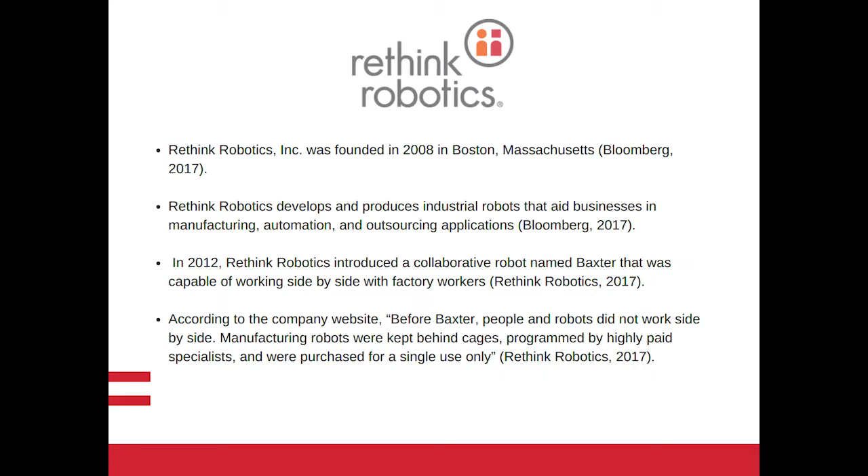Collaborative robots are significantly different from traditional robots. In the past, industrial robots were unsafe to work near, difficult to program, expensive, and were only capable of completing 10% of tasks in manufacturing.

Collaborative robots are unique in that factory workers can now engage with them in interactive ways. Collaborative robots can be programmed easily to complete tasks that were not possible in the past. For example, mundane and repetitive tasks can now be completed by robots, while human workers complete more complex tasks that require more dexterity, cognition, and judgment.

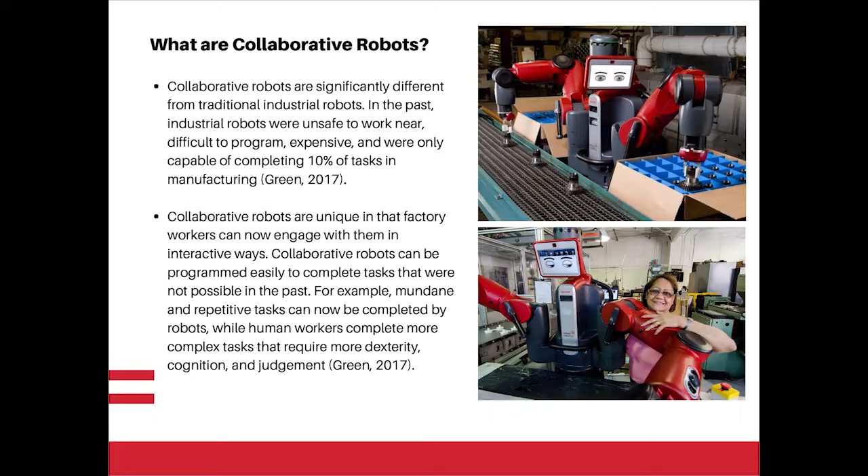Baxter is a collaborative robot that is simple to use and easy to train workers to program. It learns processes through physical demonstration by moving its arms and appendages. Baxter has embedded vision. It uses an internal camera that gives it the ability to identify parts and pick them up. Its arms have 7 degrees of freedom, much like a human.

This allows for maneuvering around tight spaces. According to the company website, this reduces work cell reconfiguration and ultimately saves time and money. The cost per robot is affordable for smaller companies at $25,000 per unit.

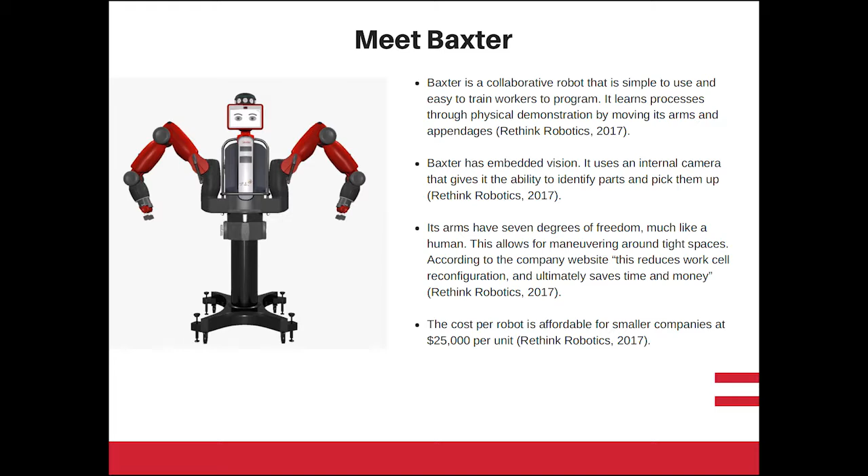Think adding automation to your production line limits you to high cost, high volume, caged robots. Think automation requires specialized robots programmed by highly trained engineers. Well, think again.

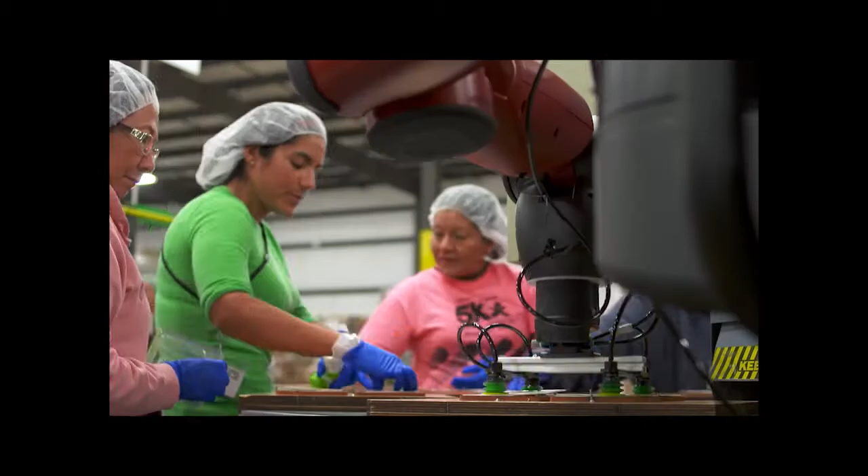Baxter breaks out from the protective cages that contain many manufacturing robots, allowing people and robots to work side by side, doing what each does best.

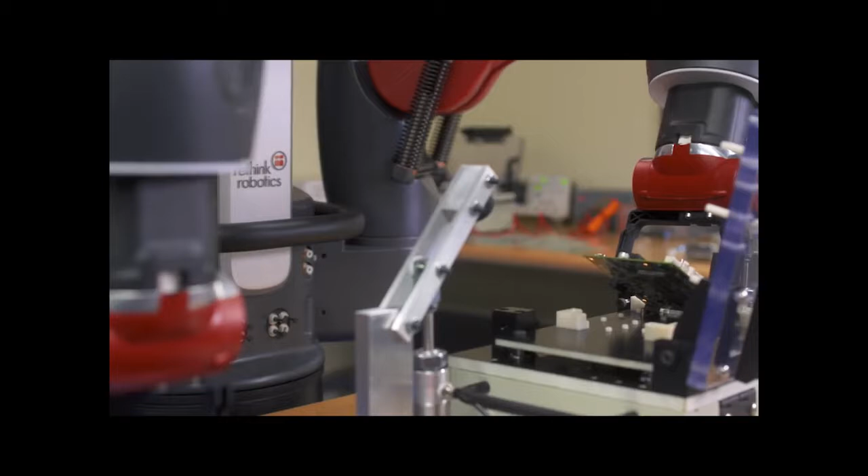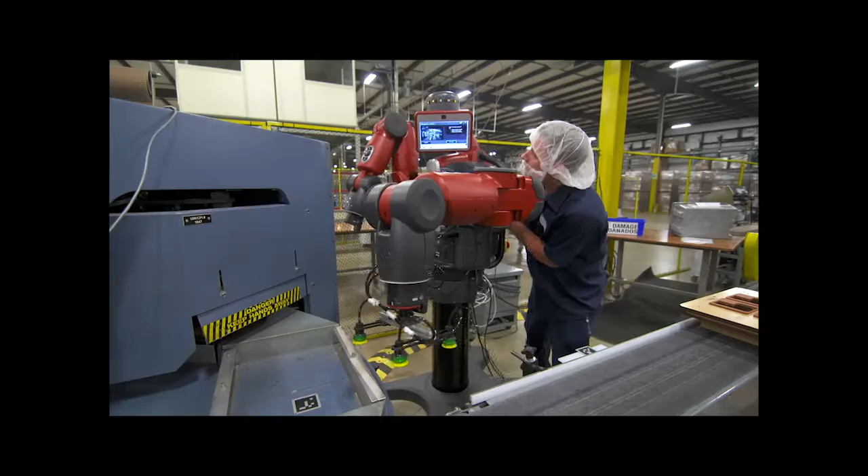From machine tending to line loading to packing and unpacking, Baxter has the flexibility to be deployed and redeployed on tasks with minimal setup or integration costs.

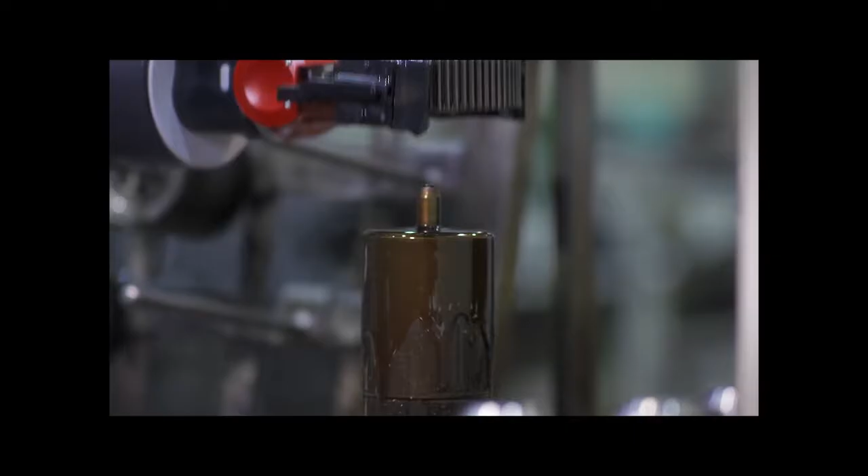Whether there's increased customer demand or the introduction of a new product, Baxter helps you create a collaborative workforce, one with increased productivity and efficiency.

Think about getting all this for a base price of $22,000. That translates into an ROI of months, not years.

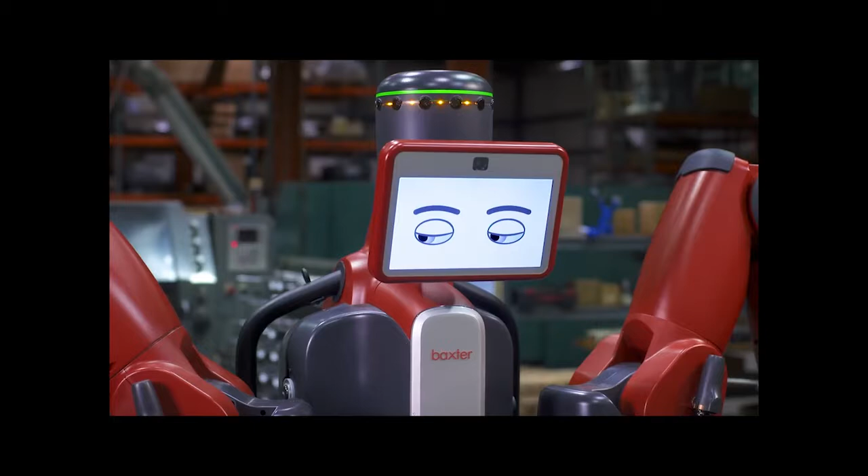Now think about what Baxter could add to your plan. Rethink manufacturing. Rethink what's next. Rethink robotics.

In a TED Talks discussion, Rodney Brooks hints that technological advances do not replace jobs, but supplement and create new ones. Historically, this has been the case. For example, when computers were first introduced, they created more jobs in the library science field, while increasing wages over time. Statistics show that the next generation of workers will not be interested in manufacturing-based positions with significant manual labor.

As a result, the future of the industry is expected to be in operations of robotics. Over the next decade, the percentage of working-age individuals will sharply decline, while retirement-aged individuals will increase. Therefore, robots will be needed as we will have decreased physical manpower over time.

Arthur C. Clarke, famous science fiction writer from the 1950s, said that we overestimate technology in the short term and we underestimate it in the long term. And I think that's some of the fear that we see about jobs disappearing from artificial intelligence and robots, that we're overestimating the technology in the short term.

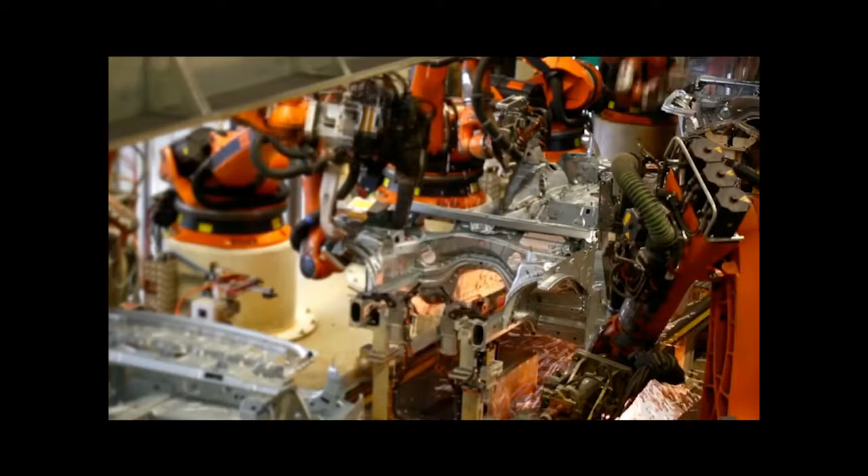And in fact, robots have become sort of ubiquitous in our lives in many ways. But I think when it comes to factory robots, people are sort of afraid, because factory robots are dangerous to be around. In order to program them, you have to understand six-dimensional vectors and quaternions, and ordinary people can't interact with them. I think it's a sort of technology that's gone wrong - it's displaced the worker from the technology. And I think we really have to look at technologies that ordinary workers can interact with.

So I want to tell you today about Baxter, which we've been talking about. Baxter I see as a first wave of robot that ordinary people can interact with in an industrial setting. So Baxter is up here. This is Chris Harbert from Rethink Robotics.

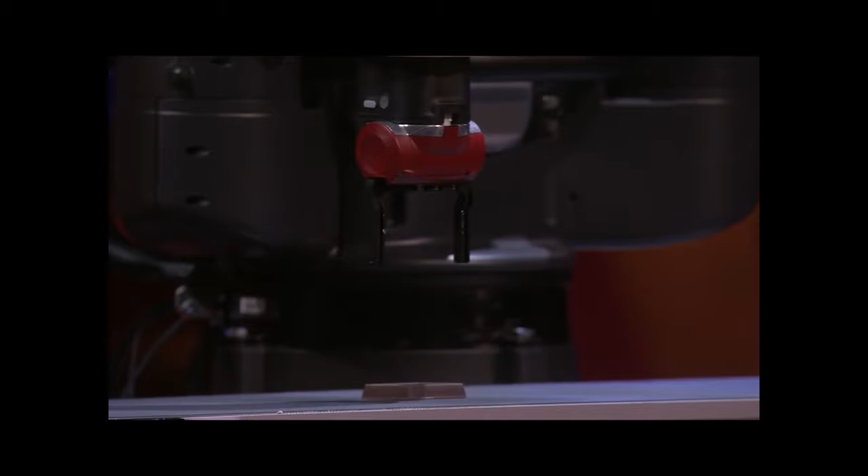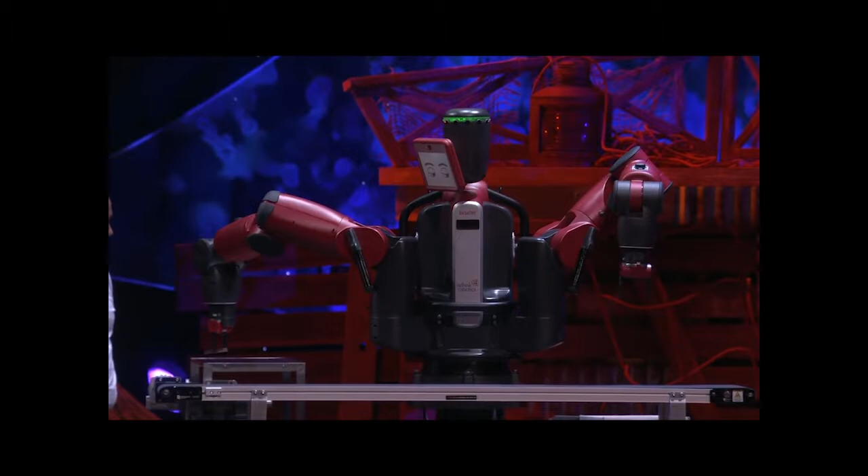We've got a conveyor there, and if the lighting isn't too extreme, there it is - so it's picked up the object off the conveyor. It's going to come bring it over here and put it down, and then it'll go back, reach for another object. The interesting thing is Baxter has some basic common sense.

By the way, what's going on with the eyes? The eyes are on the screen there. The eyes look ahead to where the robot's going to move, so a person interacting with the robot understands where it's going to reach and isn't surprised by its motions.

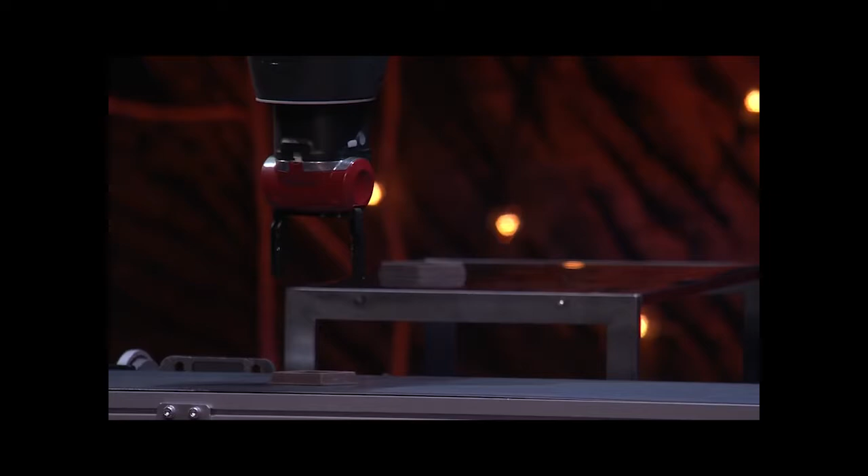Here, Chris took the object out of its hand, and Baxter didn't go and try to put it down - it went back and realized it had to get another one. It's got a little bit of basic common sense, goes and picks the object, and Baxter's safe to interact with. You wouldn't want to do this with a current industrial robot, but with Baxter, it doesn't hurt - it feels the force, understands that Chris is there, and doesn't push through him and hurt him.

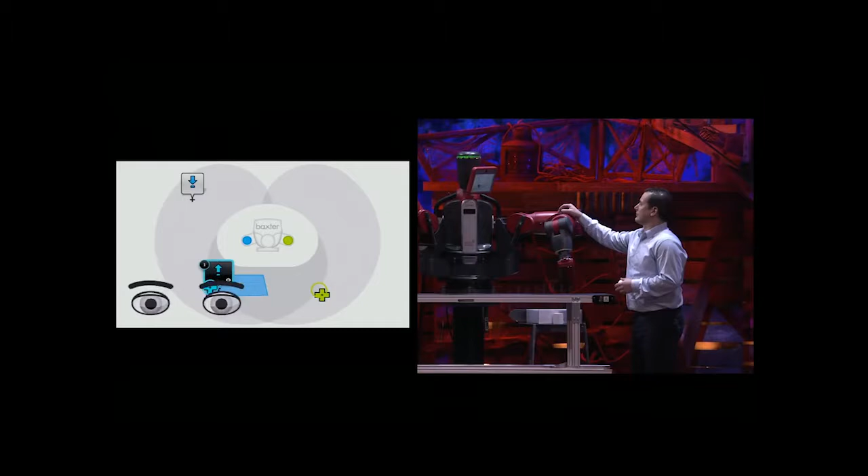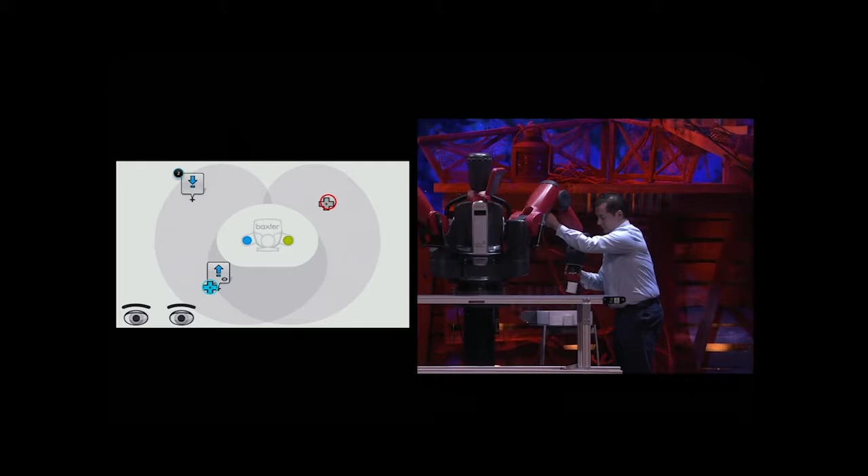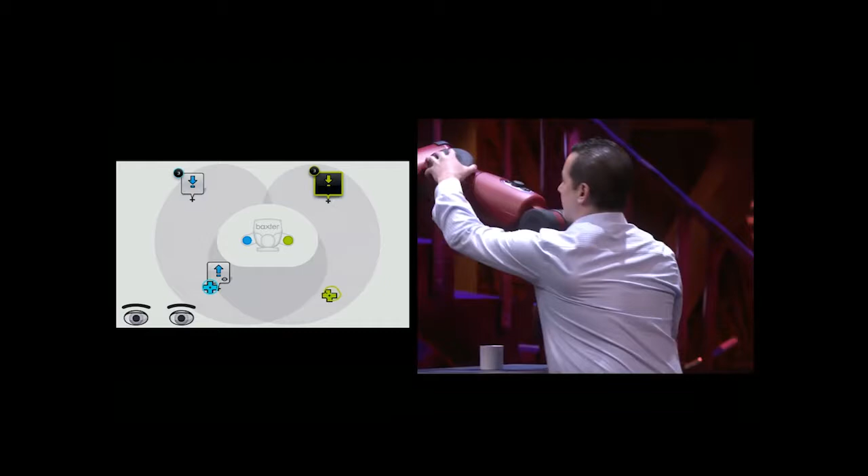He's going to put something in its hand, bring it over here, press a button and let go of that thing in the hand. And the robot figures out, he must mean I want to put stuff down - puts a little icon there, comes over here, and he gets the fingers to grasp together, and the robot infers, you want an object for me to pick up.

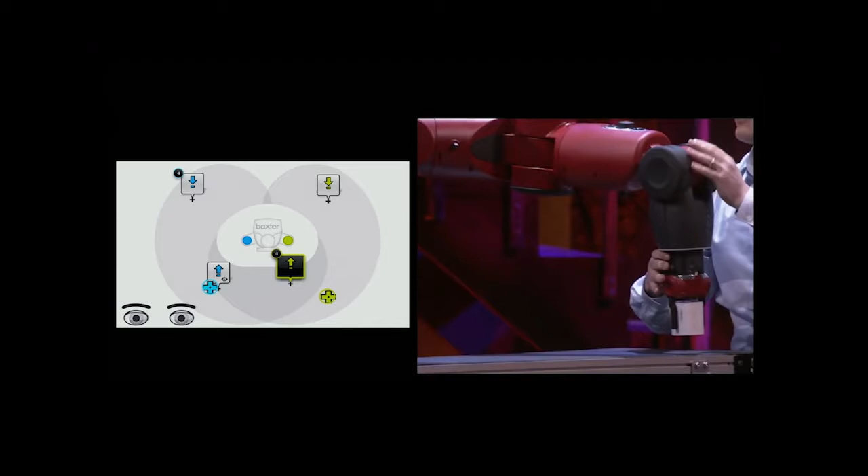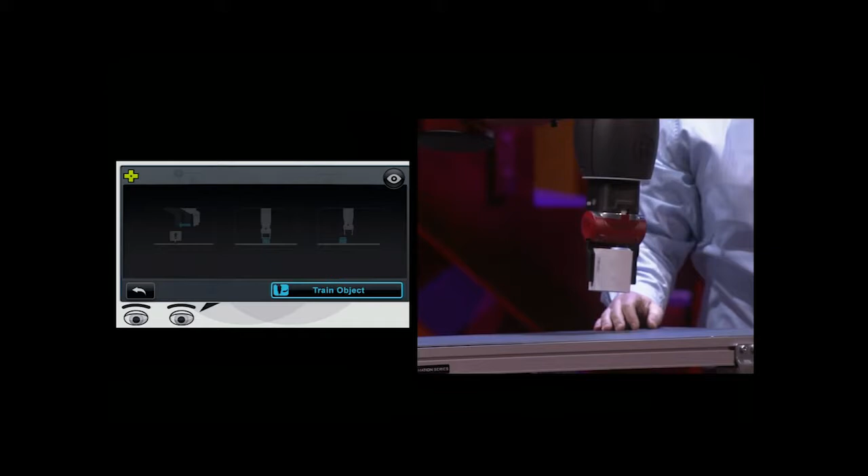He puts the green icon there. He's going to map out an area of where the robot should pick up the object from. He just moves it around, and the robot figures out that was an area search. He didn't have to select that from a menu. Now he's going to go off and train the visual appearance of that object while we continue talking.

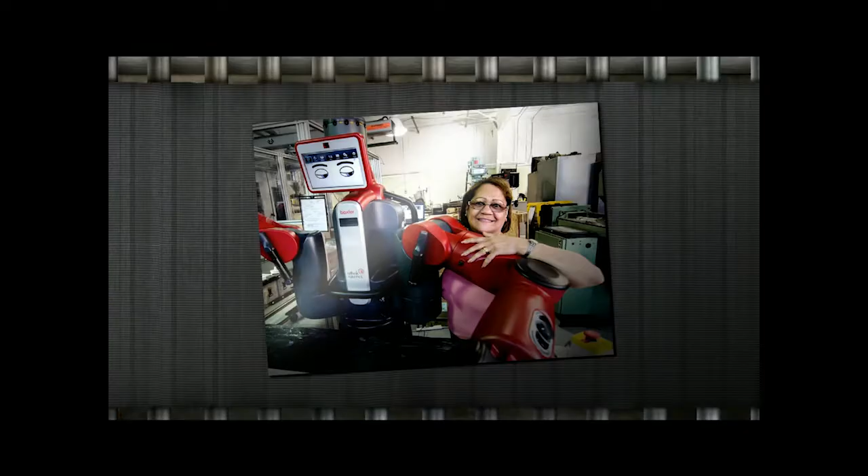As we continue here, I want to tell you about what this is like in factories. These robots we're shipping every day, they go to factories around the country. This is Mildred. Mildred's a factory worker in Connecticut. She's worked on the line for over 20 years.

One hour after she saw her first industrial robot, she had programmed it to do some tasks in the factory. She decided she really liked robots, and it was doing the simple, repetitive tasks that she had to do beforehand. Now she's got the robot doing it.

When we first went out to talk to people in factories about how we could get robots to interact with them better, one of the questions we asked them was, do you want your children to work in a factory? The universal answer was no.

I want a better job than that for my children. And as a result of that, Mildred is very typical of today's factory workers in the US. They're older, and they're getting older and older. There aren't many young people coming into factory work.

And as their tasks become more onerous on them, we need to give them tools that they can collaborate with, that they can be part of the solution so that they can continue to work and we can continue to produce in the US.

And so our vision is that Mildred, who's the line worker, becomes Mildred, the robot trainer.

She lifts her game, like the office workers of the 1980s lifted their game of what they could do. We're not giving them tools that they have to go and study for years and years in order to use. They're tools that they can just learn how to operate in a few minutes.

You know, there's two great forces that are both volitional but inevitable. That's climate change and demographics. Demographics is really going to change our world.

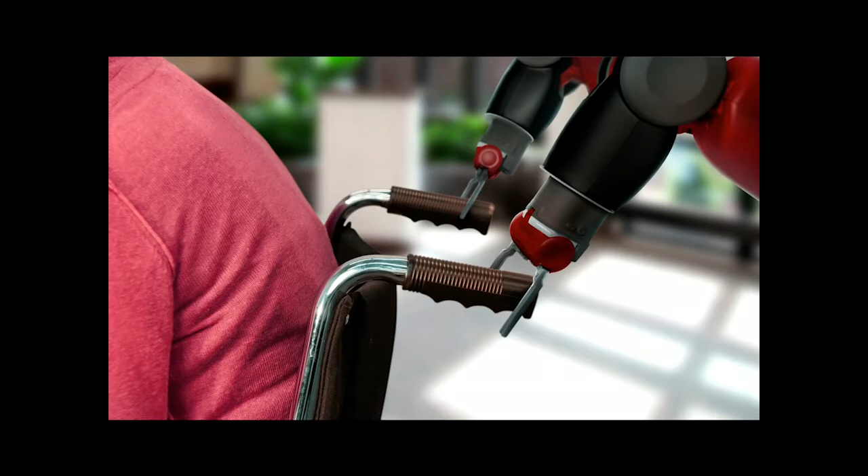And I think we're really going to have robots to help us. And I don't mean robots in terms of companions. I mean robots doing the things that we normally do for ourselves, but get harder as we get older. Getting the groceries in from the car up the stairs into the kitchen. Or even, as we get very much older, driving our cars to go visit people.

And I think robotics gives people a chance to have dignity as they get older by having control of the robotic solution, so they don't have to rely on people that are getting scarcer to help them.

And so I really think that we're going to be spending more time with robots like Baxter and working with robots like Baxter in our daily lives.

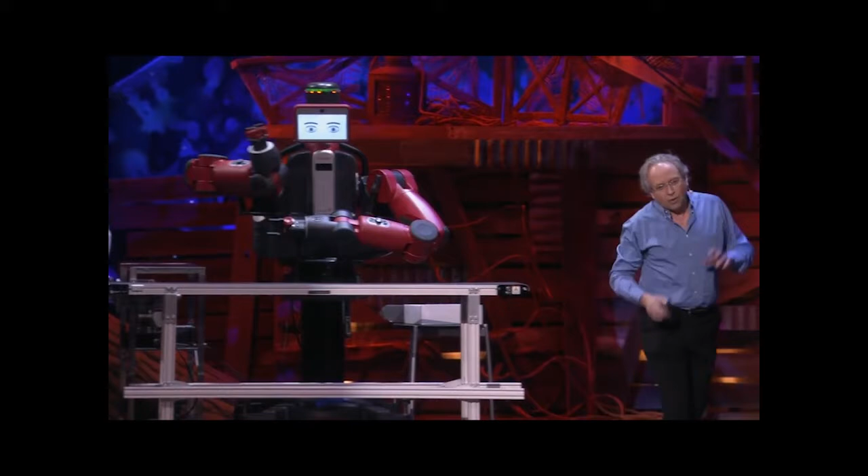And that we will, yeah Baxter, it's good, that we will all come to rely on robots over the next 40 years as part of our everyday lives. Thanks very much.

In the future, jobs in manufacturing will not be replaced at the rate that many expect. Instead, robots will work collaboratively with humans while they complete higher-level tasks. It is estimated that by the year 2030, half of the world's jobs could be performed by machines.

In contrast, there will still be a role for humans in automation, as the future will be collaborative amongst humans and robots. Jobs will not be lost because intelligence and perceptions of humans will still be needed to identify appropriate tasks.